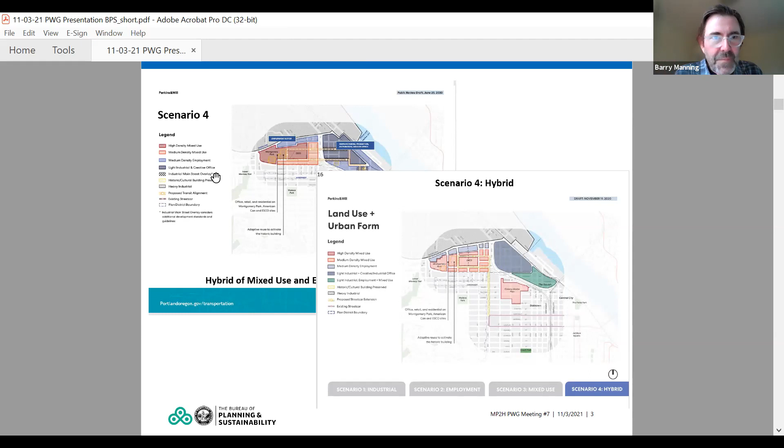As part of that, we were proposing to maintain an industrial, or non-housing, buffer against Nicolai to provide a transition to the industrial district to the north. East of Highway 30, we found there wasn't much development potential for mixed use, and that the industrial jobs opportunities there outweighed the opportunity to transition. So we were going to hold the line on the areas west of 30, and potentially consider at some future date expanding to allow industrial and creative office there, based on the outcomes of an upcoming economic opportunities analysis the Bureau of Planning is involved in, which may change the industrial land supply outlook for Portland.

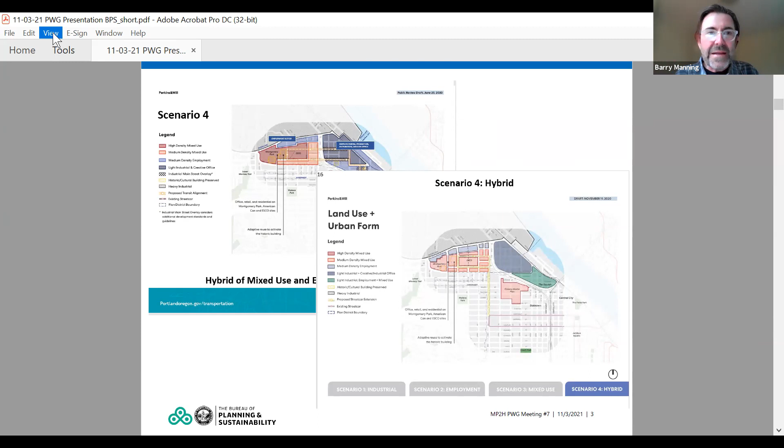We also reviewed the comprehensive plan and zoning for the area. The comprehensive plan suggested some future land uses, I'm circling those now, in the area on the ESCO property and thereabouts, that suggested those areas could transition to a mixed employment designation, while areas to the east were still planned for industry. But we also noticed we had the prime industrial overlay, shown here in this yellow line, that still applied in the area. These areas within the yellow line and beyond to the north, in the more constrained study area we looked at, that land is part of our industrial land supply inventory and is therefore constrained in terms of how much change can happen there without some offsets.

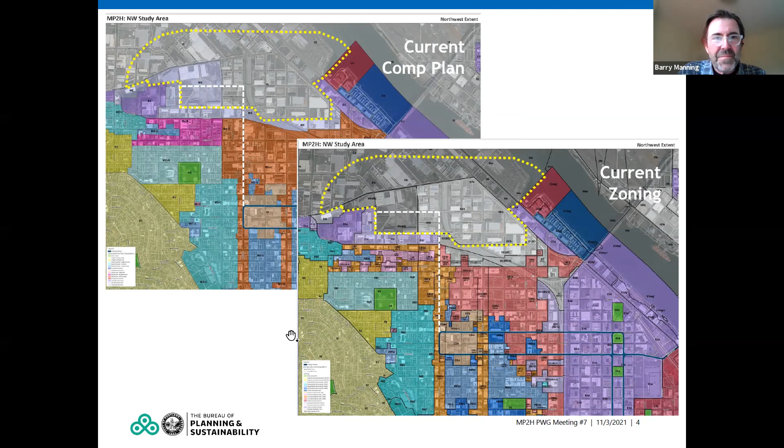We also looked at the zoning map in the area and noted that the zoning in some of these areas is still maintained as industrial rather than moving towards mixed employment. That may have something to do with the prime industrial overlays being applied there.

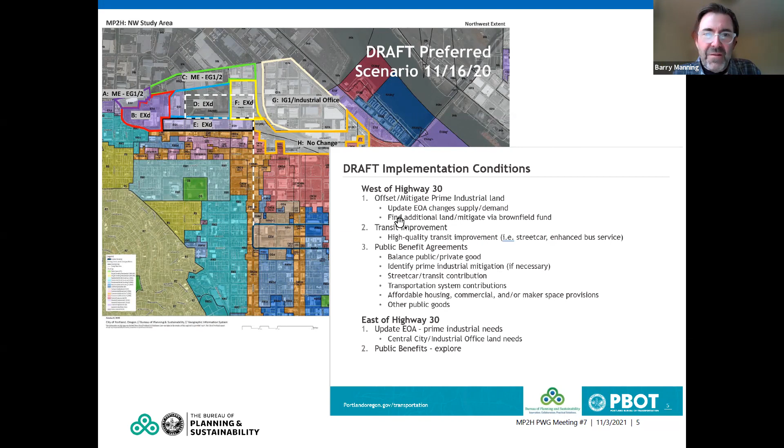We shared with you some preliminary thoughts about zoning for what we're calling the preferred scenario, which was the evolution of scenario 4. This map on the top left shows some of those ideas. We also mentioned that as part of this, there were three primary implementation conditions that needed to be met to really fully realize change in the area. We're going to talk about those in more detail as we walk through this.

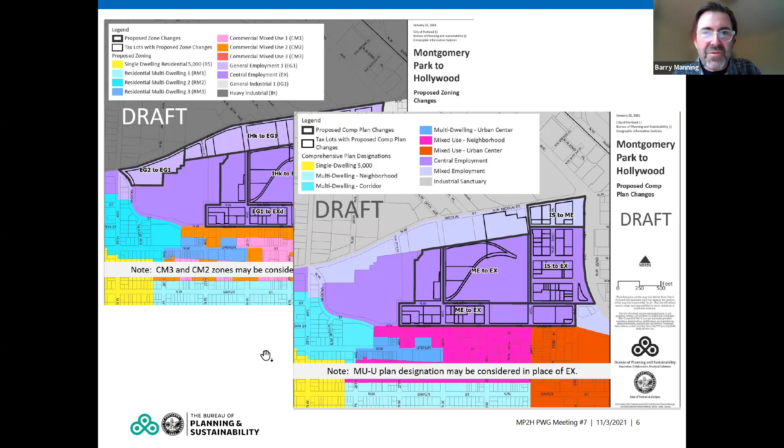Finally, we shared some proposed zoning and comprehensive plan change maps with you. These were shown in February and I think in November as well. We also shared some preliminary ideas about code elements, which you can see at the top of the page here, some zoning concepts in a plan district and some boundaries for a future plan district. Those are shown at the bottom of the page, and a pie chart here showing how value and public benefits might be distributed.

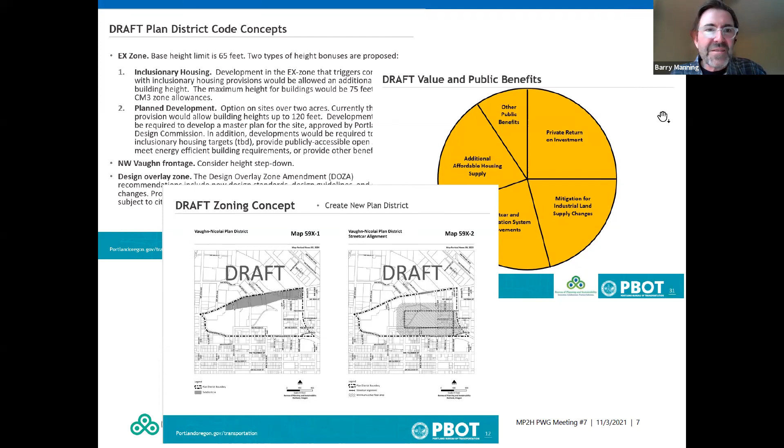If you remember, one of the key things in this project is how do we address change in the area and do it in a more equitable manner that does not impact negatively underrepresented and BIPOC communities, provides opportunities for folks, and does a bit more equitable sharing of the benefits that might accrue due to public actions such as zoning changes or public investments. So that's kind of where we left off.

I'm seeing people nodding their heads, so I assume that looks familiar to folks. So where we're at now is we've got a proposal that's coming out.

In summary, what we're doing is fostering a new mixed-use neighborhood west of Highway 30. We talked about that in scenario 4, which would include changing the comprehensive plan in that area to facilitate mixed-use development. As part of that process we want to create public benefits. The public benefits we had been talking about when we last met are coming more into focus now.

The main one that we're looking for is affordable housing. We're going to be proposing to use some zoning bonus tools to achieve that. We'll talk about that in more detail in a minute.

Affordable commercial space, again, proposing to use zoning tools to achieve that right now. Some public amenities such as open space and energy efficient buildings, again, we're looking at using zoning and bonus tools to achieve that.

And then some degree of equity and wealth building, primarily for BIPOC communities, which might be through contracting requirements or something like that through construction, achieved through a benefits agreement developed with property owners. Overall, we think these public benefits have multiple ways to be achieved.

What you're seeing in the discussion draft, at least partially for the top 3, is a proposal to do them through zoning, but there may be other ways to do that through an agreement with property owners. We want to let that discussion draft period allow for that conversation, both with the public, community members, and property owners, to give us feedback on the best way to achieve some of those benefits. But we are proposing something in the discussion draft.

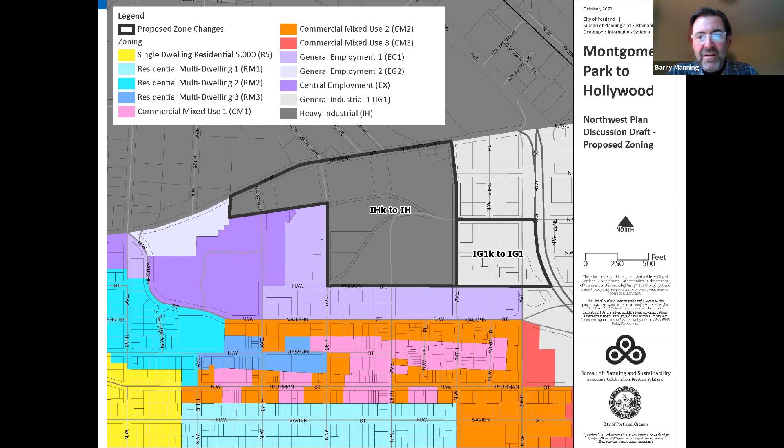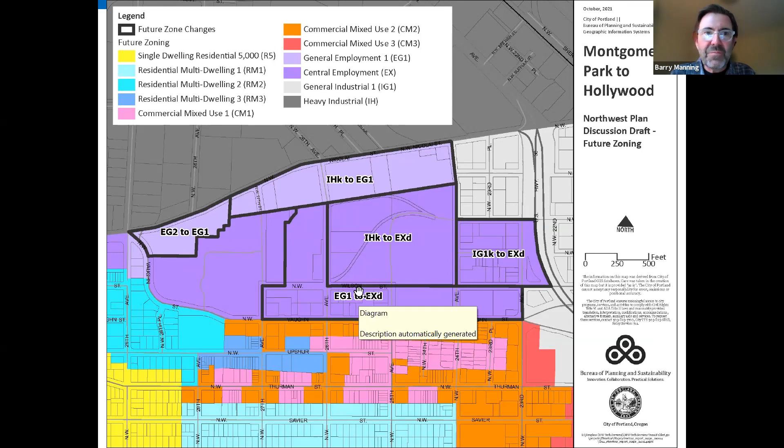Each of these properties has a different set of existing regulatory conditions and constraints. They're all in different zones, with different floor area limitations and use limitations. What we've done is arrange the bonus structure to ultimately get to similar levels of development for many of these properties, not all of them, using a set of tools that graduate how much additional development potential you can get by exercising these bonuses. We'll walk through those in a minute.

The plan district components—I'm starting at the beginning, and we'll get to those use regulations in a second. As I mentioned, the zoning map amendments would have a limitation on them unless conditions could be met to address industrial mitigation, transit funding, and a master street plan for the area north of Roosevelt Street. There's a few use prohibitions.

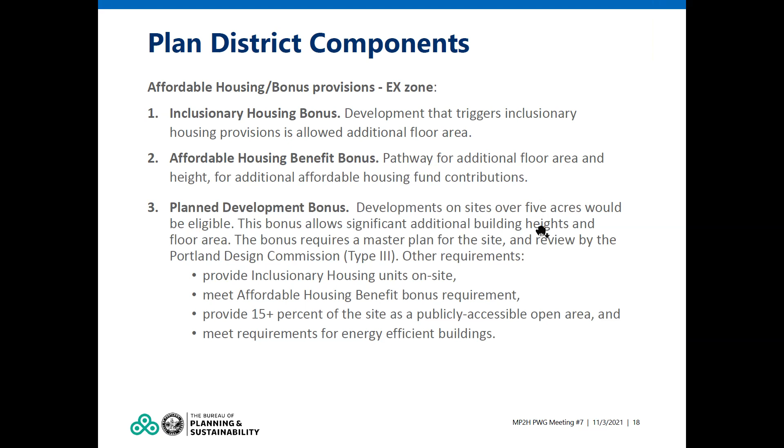Great, thanks, Barry. And the master plan provisions, as they're proposed right now, or plan development provisions, excuse me, are embedded in that volume 2 code. They're at the end of that. So take a look at that. That's where this exists. Okay, thanks.

And I'm sorry, I think I may have missed this, but the subdistrict definition, is that included somewhere? The subdistricts are identified on the map. No, I know, but what do they mean? Oh, well, so again, the different subdistricts will have different floor area and height limits that are allowed within them. And I'm just going to show you what this is. I don't want to spend time on it. Is that in one of these documents somewhere? Volume two. Yep, it is. Okay, I'm sorry, all in volume 2.

So just really quickly, this is a lot of numbers to digest, but we're going to walk through it really quickly so you can kind of get an idea of how this would work in these different areas. So Subdistrict A is the buffer along Nicolai. It does not allow housing. We would ultimately be using the ultimate zoning in that area, which would be EG, an employment zone.

It would have a base FAR of 3:1, which is what the EG zone has currently. But that FAR would be for industrial uses, and the maximum FAR for other uses such as commercial would be limited to 1:1. The base height is 65. That's already allowed in EG. But one would have to apply for bonuses to get additional FAR and height.

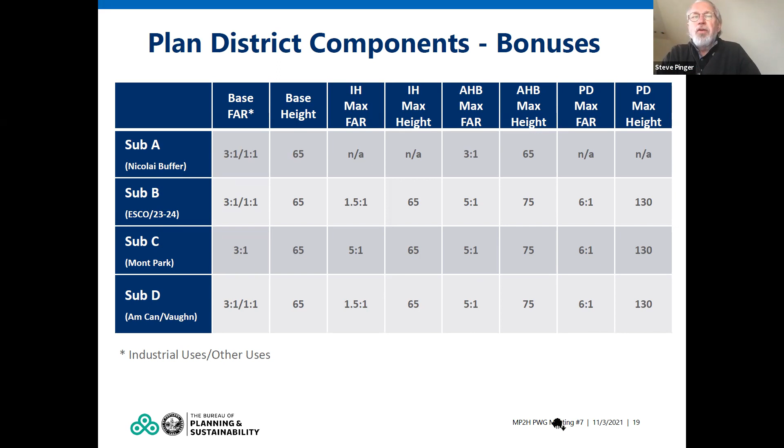Steve: Yes, it does, Barry. Without commenting on that, it certainly does. I'm just having trouble locating this information in volume 2. Is it in there somewhere? I'll point out where those things are at the end of the presentation.

Greg, I saw you have your hand up. Why don't I go ahead and answer your question really quickly? Yeah, thanks. Yeah, that's good information.

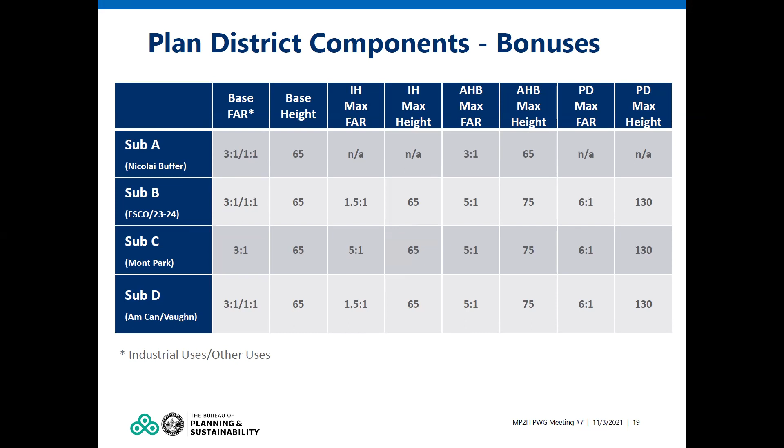I was also wondering, you had that graphic early on in the slide presentation showing the current and the future layout. How does that, this is all a lot of numbers, a lot of information. Graphically, does that show one or more of these? As far as, I don't know if you can go back to that.

Maybe the sub areas. So this map 590-1 shows those 4 sub areas. And you'll see, this is the graphic convention of our zoning code. So it's not necessarily as user-friendly as you would like it to be, but you can see they're detailed down here. Okay, no, I get that.

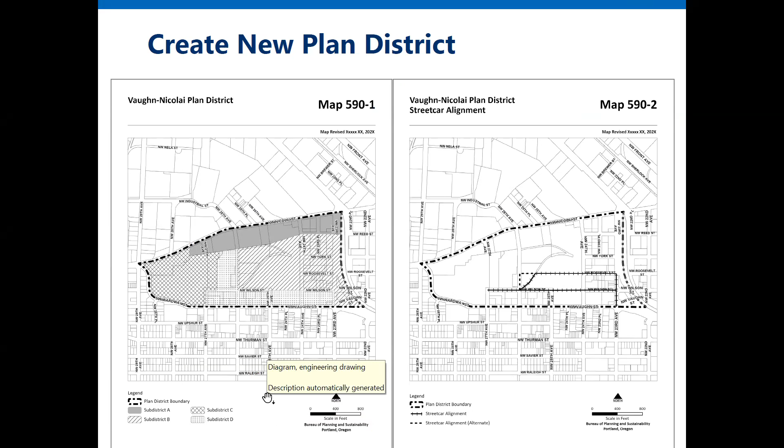Yeah, that's great. I see how that tied into the different areas, but I was talking about the architectural graphic that made it a little easier to see the 3-dimensional type. Oh, let me walk through the code and let's save that, we can come back to that a little bit later. Greg, is that okay?

That's fine, thanks. So Barry, this information's on page 41 then. I think I finally found it. In volume, is that 2, correct? Probably. Table 590-1. That is it. That is it.

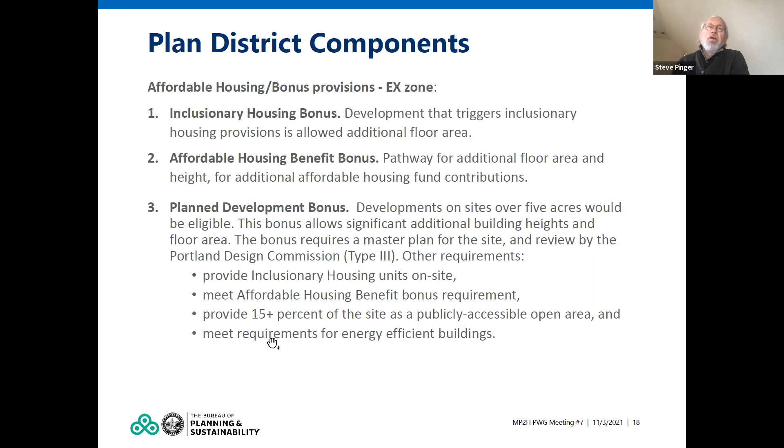Okay, so just a few other regulatory things we're proposing in volume 2. I mentioned the commercial floor area—it's limited in some sub-districts, which is what I walked through in that table. Again, additional floor area is allowed through the affordable housing benefit bonus option or the planned development bonus option if they go in that direction.

Height limits: we're proposing a base height limit of 65 feet, which is what most of those properties are allowed to build to right now. We're proposing a step-down height of 45 feet near Vaughn Street to match or mirror the scale of development across the street in the mixed use zones. But one could get additional height via some bonus options.

We are proposing a minimum residential density if property owners go in the direction of developing residential units on their property. And then we have some other typical urban plan district kind of provisions.

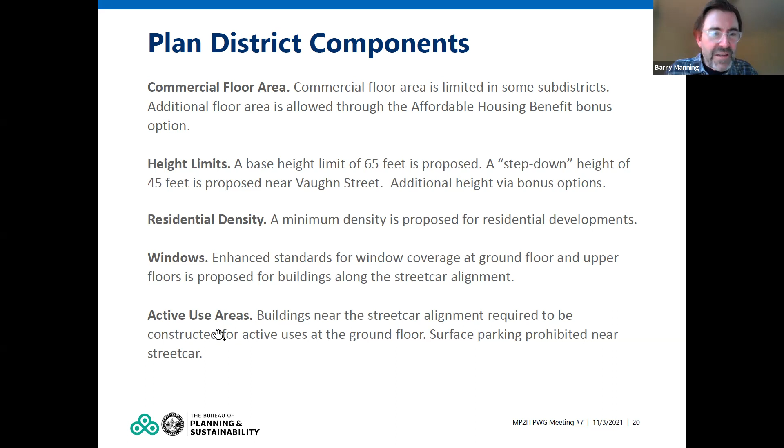We're asking for higher levels of window coverage at the ground floor, particularly near transit, near the streetcar alignment. We're asking for active use areas near the streetcar alignment. We're limiting parking, and particularly limiting surface parking near the streetcar alignment.

One of the new provisions that was in our mixed use zone code was the requirement for on-site open areas for residential units, so we're including that in this plan district. That would be similar to the CM3 zone in the mixed use zones. This requires a minimum amount of open area per unit that's built—36 or 48 square feet per unit, depending on the scale of development.

Prior to this, some of our more intense zones did not require any open areas for residential development. The intent behind this is to provide either individual or collective green spaces that serve the residential units built in these areas.

We're applying the design overlay zone, which is a tool we typically apply in the high density or higher density zones in the city. Steve and others familiar with the NWDA design overlay will recognize that. It requires either use of supplemental design standards or potentially review with use of design guidelines, depending on the type of proposal.

We're applying a transportation demand management requirement. This is something applied in our commercial mixed use zones that requires new developments with residential units—and we're applying this to large commercial developments here—to create a transportation demand management plan or subscribe to an off-the-shelf program.

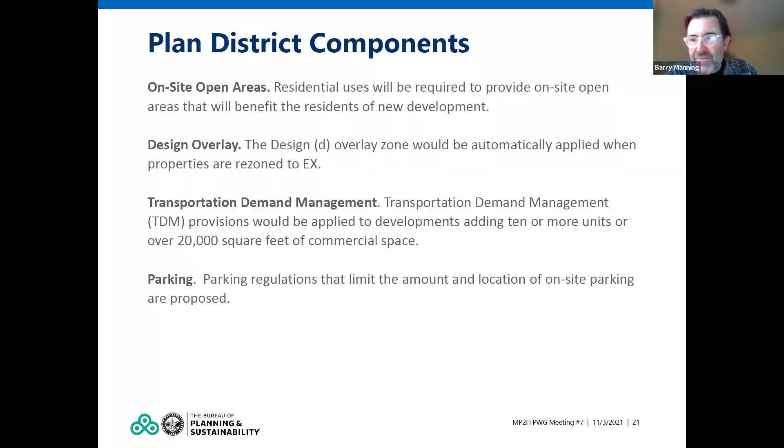We haven't gone that far with the code, but I'll let Julia and Mauricio speak to that when they talk about transportation, unless you guys want to hit on that now. I think I can hit it now.

What we have citywide is a proposal and a regulation that says upon new construction, each new housing unit shall provide $1,000, I think, to be used for TDM purposes. That wasn't the case at Conway, so I think we started with that premise. That is what's in volume 1.

The main approach has been to go ahead with streetcar and with parking regulations to address the supply—we don't want to overwhelm the district with vehicles, and we want to maximize the density. What Mauricio is talking about is the off-the-shelf option. There's also still an option to do a custom plan through the review.

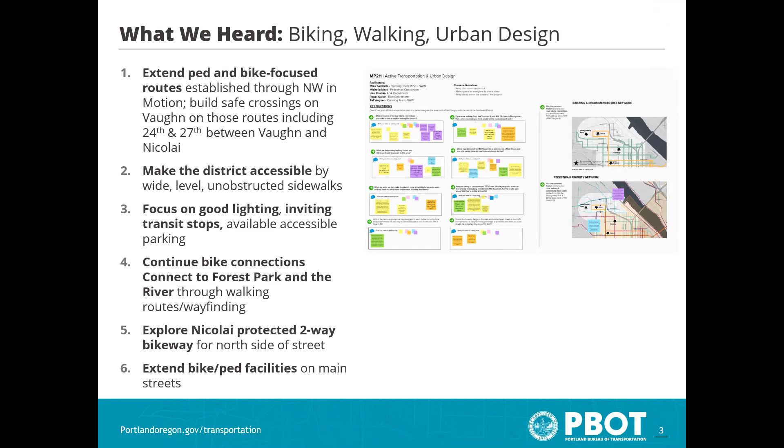Right, so for large complex sites it might be more beneficial to do the review and a custom plan; smaller sites might be more beneficial to just do the off-the-shelf option. At least that was the thinking with the commercial mixed use zones. Steve, did you have another question? Oh, I'm sorry—okay, any other questions on the land use piece of this before Julia takes over?

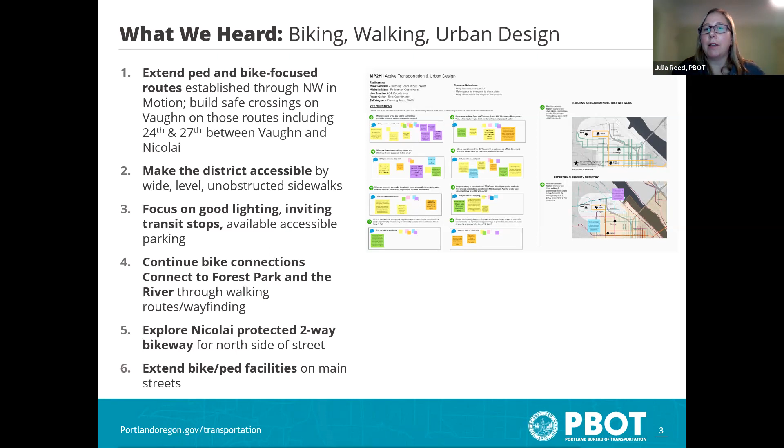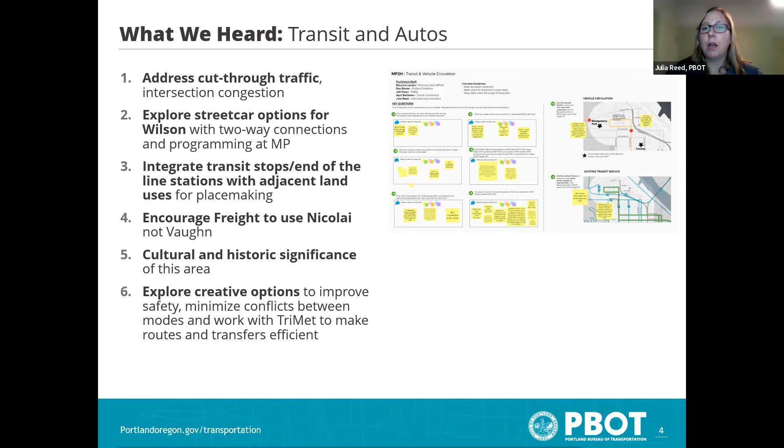I want to start with a recap of what we heard from community engagement about transportation, zooming back out from what we've been discussing. We heard support for extending pedestrian and bike routes through the district, including improving connections to Forest Park and to the east, interest in making the district accessible for people of all ages and abilities, and the importance of active ground floor uses, inviting transit stops, lighting, and on-street parking. We also heard concern about traffic volumes and cut-through traffic. There's interest in exploring a two-way streetcar option on Wilson, which I'll talk about in a moment, and support for creating great urban spaces through transit station environments and other urban spaces in the district. We've been engaged in conversations with community-based organizations to elevate the voices of disproportionately impacted communities, including ways to honor the cultural history of this area.

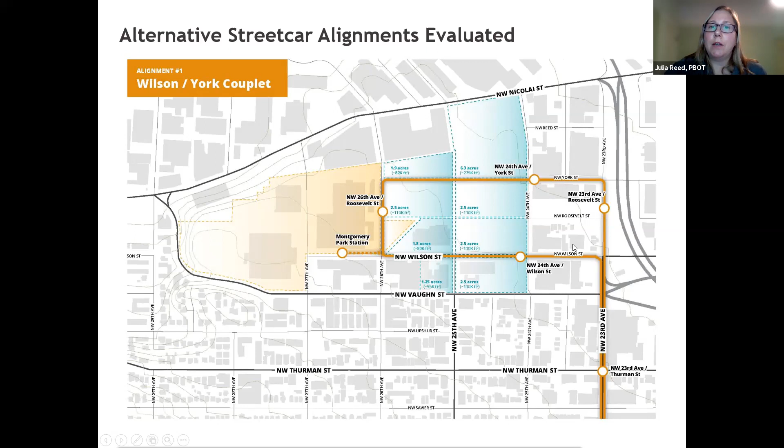Last time we met, this was the alignment: a couplet streetcar, westbound traveling north on 23rd, west on York, south on 26th, then returning one-way eastbound on Wilson to join 23rd. This York alignment was really a legacy of when we were considering an alignment east of US 30. Based on conversations with property owners, we started evaluating other options.

So this is the two-way streetcar option on Wilson. The streetcar would come up 23rd, travel down Wilson, terminate at Montgomery Park, and then go back on Wilson. We found that this was fatally flawed—it doesn't work for streetcar operations because of the delay it would cause at the 23rd and Vaughn intersection, and it would also eliminate access for property owners on Wilson. So that one is not viable.

This is the alignment for the streetcar that you'll see in the transportation draft next week. We have a separate transportation plan that we'll email to you a week from today—you'll get to see it before anyone else. This shows Roosevelt and Wilson with a tail track. The streetcar would travel one way westbound on Roosevelt, stop at Montgomery Park, and then go back on Wilson. This is a natural progression of the streetcar alignment design. It's compatible with other planning done to date, and our engineering review doesn't reveal any significant impact to traffic operations, including the ramp at the Vaughn and 23rd intersection.

As with any of the other options, this would require the northern section of the ESCO site to meet street connectivity requirements. We're showing these as indications that there needs to be a street connecting along the alignment of 25th, connecting north to Nicolai, and some east-west street connection is needed. It doesn't necessarily need to be right at York—it could be a little further north. There's flexibility in this.

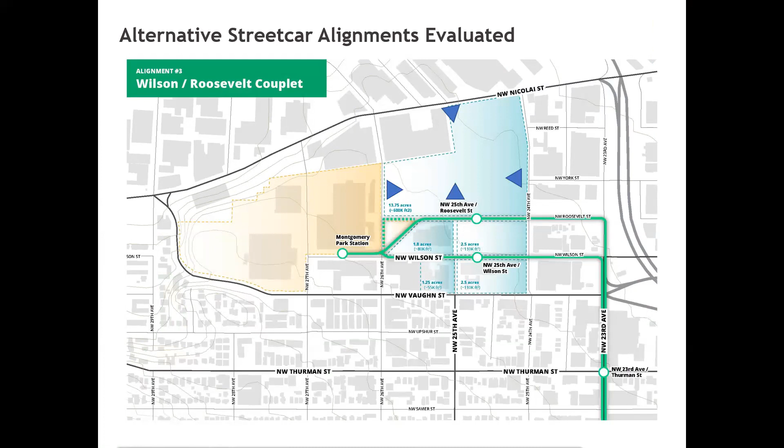I have a question. I understand why the one-block couplet makes more sense than the two-block couplet, but you mentioned the two-block couplet was fatally flawed because of impacts to operations at 23rd and Vaughn. No—the one that was fatally flawed is the alignment that isn't a couplet at all; it's the streetcar traveling down Wilson and turning back around. That's what I meant, but you mentioned that this one on the screen is fatally flawed. Yes, at 23rd and Vaughn, but the one-block couplet wouldn't be, and I'm confused as to why that is.

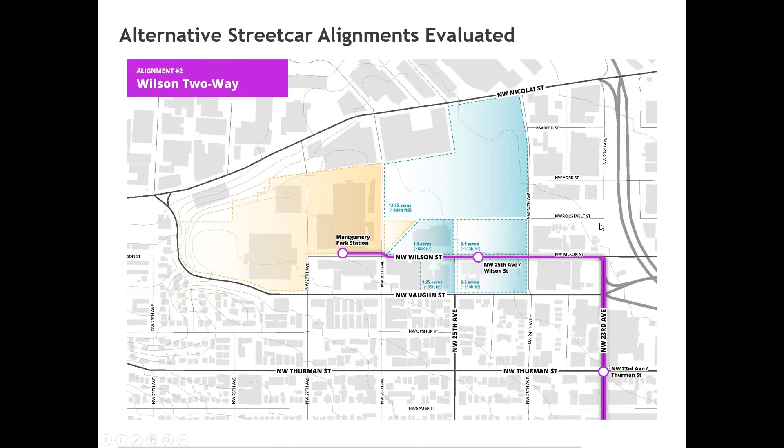Excellent question—I'll start, and others can chime in. It has to do with both streetcars turning at this intersection versus one traveling up and not getting stuck in the queue back here. Does anyone else have anything to add? One part of it is that the northbound streetcar would have to sit on 23rd to trigger the signal and stop all traffic to make the turn, which would back up traffic into the Vaughn and 23rd intersection.

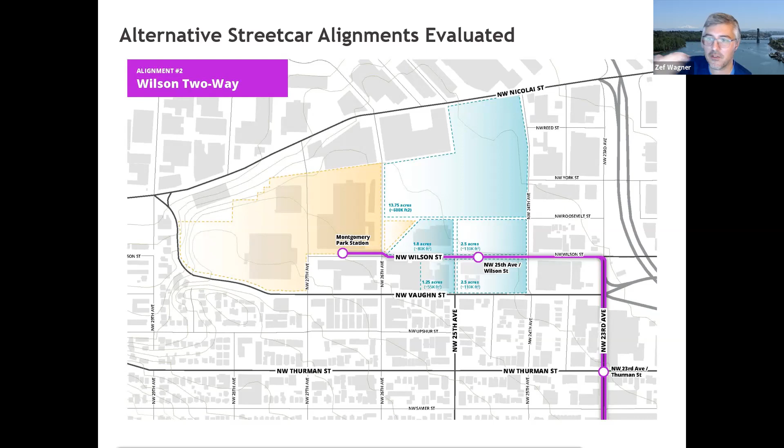Whereas if it goes north to Roosevelt, we can time the signal so that it clears both of those signals and doesn't have to stop until Roosevelt, which just having that extra block provides more queuing space. The other thing, Roosevelt will be easier to make the turn because it's a T intersection, easier to stop traffic. And the other issue was that Wilson already exists between 23rd and 24th and between 25th and 26th, and you wouldn't be able to have a streetcar going in both directions on a single track and still have vehicles access all those driveways of those businesses.

And finally, this option came up as part of our public outreach back in the day, and it's something that the property owners at Montgomery Park were still interested in. So we took a closer look.

But also the York alignment is, if you will, a legacy idea from when we started the project, when we were looking at streetcar on both sides of Highway 30. Through the public process, we decided to focus the attention of land use change to this side of the freeway, and therefore reevaluating the alignment. We don't have a reason like we did in the Pearl, where we needed to go by the Good Samaritan Hospital.

Here we can run a streetcar on two streets next to each other. I think that's better, operationally it's cheaper, it's a shorter alignment, and also it can provide access to a tail track, if you will, to Montgomery Park, something that we've heard quite often. But still maintain operations because it's a shorter alignment.

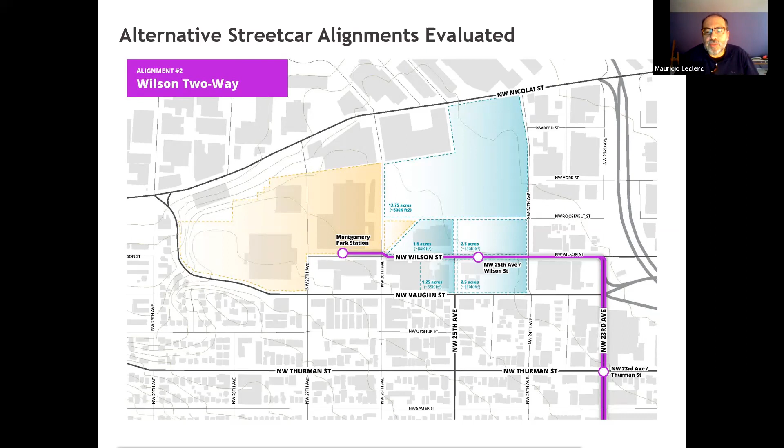So all these factors are pointing to a new alignment that you did not see before, but it's roughly a refinement of something that's already been discussed with you.

So I think another factor, Mauricio, just from the land use side, is that it allows a little more flexibility for the larger acreage on the north side of the ESCO site to evolve over time, rather than committing to that east-west connectivity in exactly the street location.

And therefore we met with ESCO and Montgomery Park to begin to understand what streetcar means, what are some of the pros and cons. And out of that discussion came this new alignment, again, consistent with what we've discussed so far.

Phil, did you have a question that was different from Reza's? Yeah.

I'm fine with this alignment, and I think we all know streetcar is the centerpiece of the study, but I think it would provide useful context on a map like this to also show the bus routes, because streetcar is not the only transit mode serving the study area. There are several bus routes also in the immediate proximity, especially a new one over the Fremont Bridge, which I think will be important. That's coming up in subsequent slides.

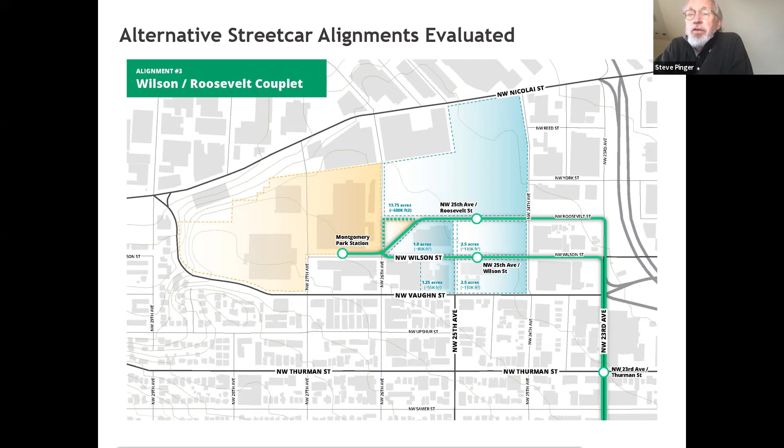Right, no, I understand all of that, but what it takes, and what we discussed with the larger Northwest area, is to do a streetscape plan to look comprehensively at this. But please, these specific impacts have been mentioned previously as being actual, and I just want to confirm for the sake of my group, are those likely to be the impacts? Yes or no?

Well, we haven't analyzed it. It is likely that. Okay, that's fine, but that's what had been relayed previously. Yeah, and we haven't quite analyzed it, so I can't give you an answer.

But that's dependent on the streetscape study? It depends on many factors—there are utilities, there are opportunities. Oh, yeah, I understand, but the streetscape study is far from definite at this point, I would say.

No, it's funded by the city, it's in our budget. Through the PSAC? Not the streetscape plan, that's my understanding. Two things are getting confused here—sorry, we might be using the same term for two different things.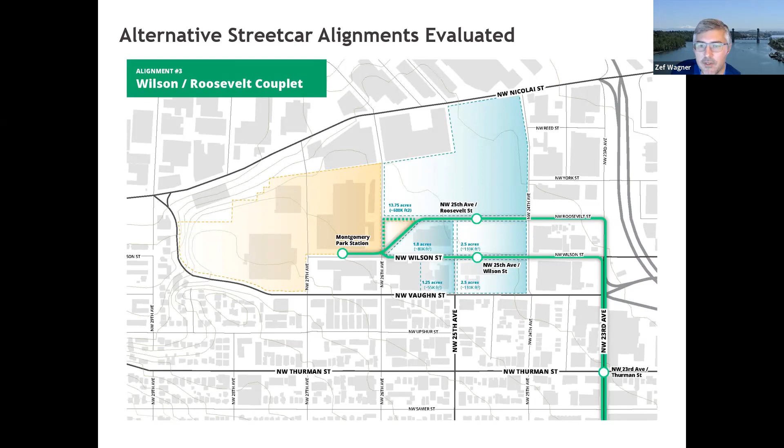The parking committee, I believe, is funding some streetscape work south of Lovejoy on 23rd and 21st and some other streets. From York to Burnside was the original proposal. Okay, we'll need to revisit that—the last thing I had heard needs to be clarified. Let's move on, yeah, we can follow up. My understanding is it's funded.

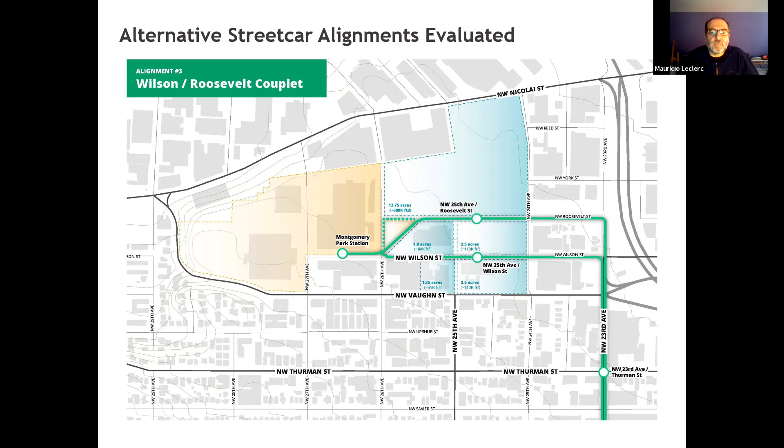Okay, let's move on. Yeah, thanks, Phil, for that question. We do have more transit stuff to discuss.

I just want to do a walkthrough of the vision map, starting with the major roads. Much of the vision for the district, transportation-wise and land use-wise, is the same, with a few design progression things I want to point out. One of them is the streetcar alignment.

We're doing this plan because of near-term and known anticipated land use changes, but also for the opportunity to shape a coherent transit-oriented district here. Extending the streetcar is one of several ways that we're going to help reduce drive-alone trips. So this is the streetcar alignment again.

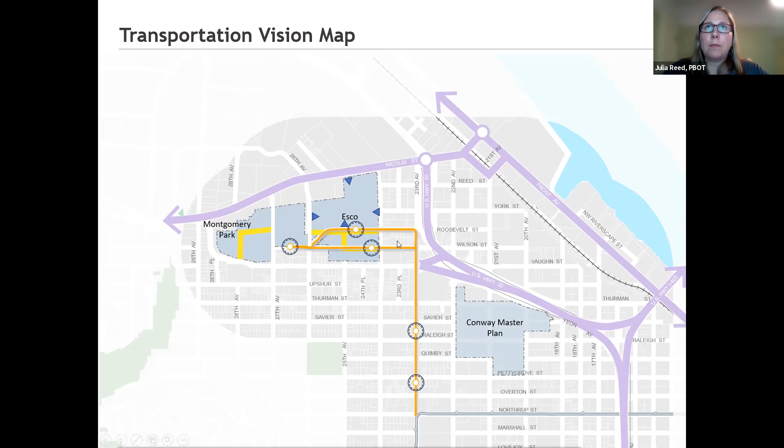Also, the yellow indicates new streets. This is a new private street that will be publicly accessible through Montgomery Park—it's in their plan. And this yellow underneath shows the formalization and extension of Wilson, extension of Roosevelt from 24th to 26th, and the extension of 25th to Roosevelt.

And again, those future streets that will need to be constructed north of Roosevelt. The pedestrian and bike connections within the district build off of the recommended ped-bike projects from Northwest in Motion—extending the 24th Greenway north to Nicolai, making Vaughn safer, improving all crossings of Vaughn. We see 24th as really the primary pedestrian and bike entryway into the district.

I also want to point out that we are putting in our plan the recommendation for using the abandoned railroad spur on the north side of Nicolai as a multi-use path. One of the things we thought about in developing this is ways for folks to safely get around the US 30 interchanges—looking at ways to provide safe, low-stress routes without having to cross the on-ramp.

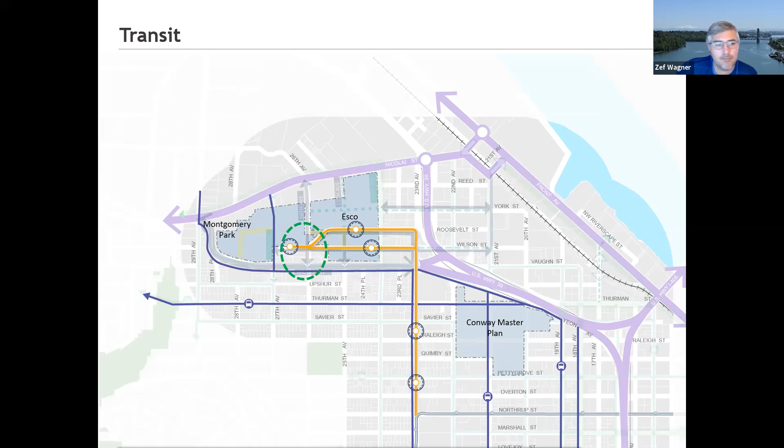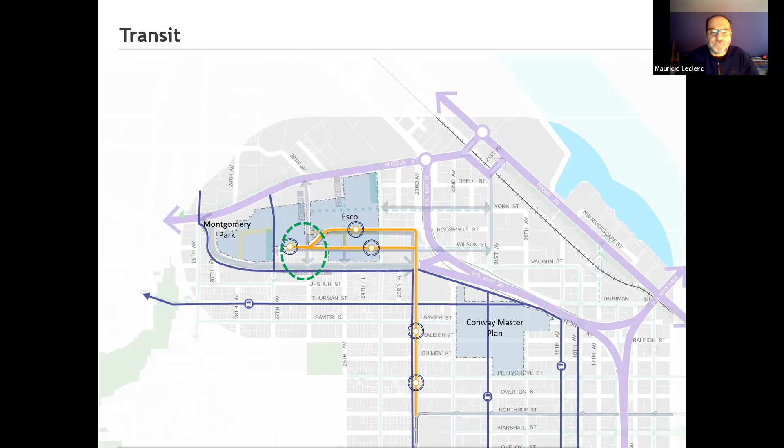We're trying to do a lot of things with this plan. One is a land use plan with a long-term vision, and also a bit of project development for streetcar. Let's make sure we know what we're looking at here - this is very much a concept at this point. We have an alignment, but the precise location of stops, far side, near side, all that is to be determined with a subsequent project.

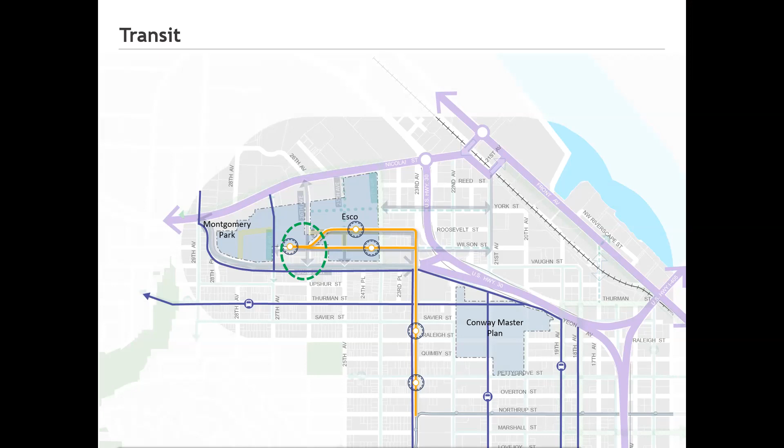The other question I had is this seems to be missing whatever future transit line might be on Raleigh Street, which was in the North Central Service Enhancement Plan for TriMet. I know it's kind of far off in the future, but it's a line that's very important to the Pearl District. It's on our radar, though I'm not sure exactly where it would make sense to go.

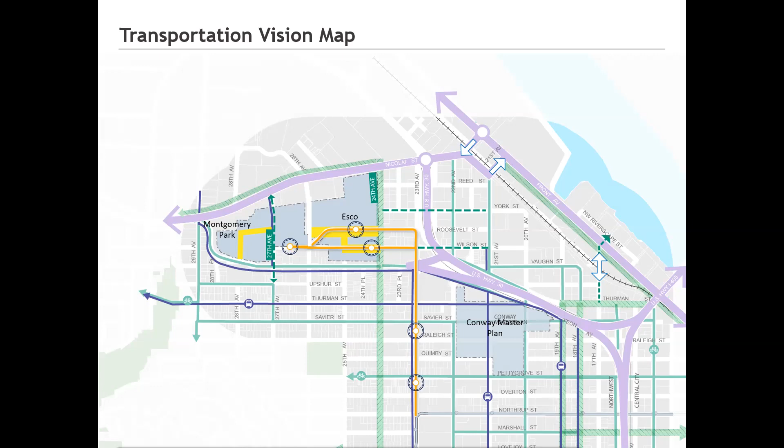Maybe now that this streetcar line is going to 23rd, it makes sense to think about whether that line could go into that squish area north of Highway 30 and terminate at the ESCO site to provide more transit coverage in this area. But please include the bus line on Raleigh, the future line there as well, because that is part of the vision for this part of Portland.

Yeah, this is an interesting area from a transit perspective. Also, line 16 from St. John's is highly underutilized - oh yeah, that should be on there as well.

It'd be nice if we could integrate what would be the larger transit network vision for this district. Having these potential land use changes allows us to have a deeper conversation with transit and with TriMet in the near term, especially if we move forward with the streetcar project, right? Right. So, good questions.

Okay, Jen, you had a question - has her hand up yet?

Hi, Julia. I just wanted to express appreciation for how you've unpacked the complexities of this. While I understand there's some future state stuff, it's been great to actually track what's happening, because not everyone at this table has all this jargon under their belt. Thank you for making it accessible for people who are not familiar with land use planning but want to help inform decisions based on community feedback. So just wanted to say thanks.

Perfect, thank you, thank you. Now I think my slides are next, and I hope not to - Phil's got his hand up. Okay sorry, quick one, that was a nice comment from Jen, so I agree.

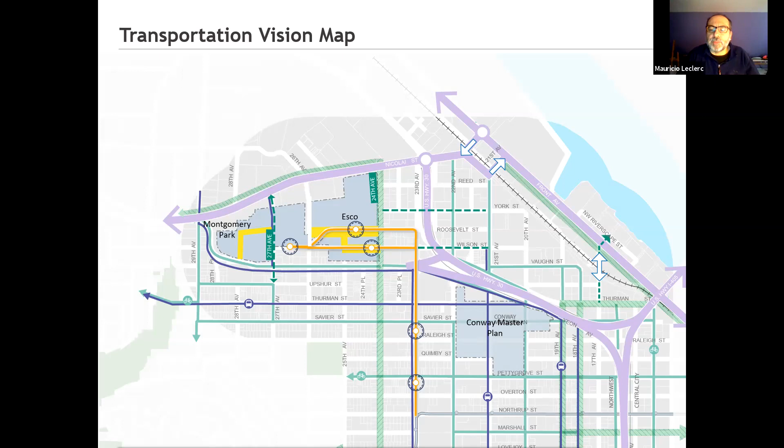We'll certainly have an action item identified in the plan to continue and have a more thorough conversation as these changes take place, engaging TriMet now but more if adopted by council. Here, we're just beginning the discussion.

All right, so I hope not to undo what Jen just said, or overwhelm you with information. I'm going to provide a very broad view of the traffic analysis and the circulation at a very high level. We hope to, no pressure right now. So basically, what we're talking about now is...

We take into consideration what Julia just mentioned. There will be a streetcar, there will be new streets of high quality, high urban design standards, new bikeways and transit options.

But of course, with growth in an area that already has a lot of traffic, what does it mean? To do that, we take these numbers that we've shown you in the past and today, just thousands of new jobs here and housing units. What does it mean for the street network?

Basically what we do is use a transportation model. We translate those numbers into numbers that belong to a block, representing buildings and activity, and we run the model with existing traffic and all that stuff. So we have done that.

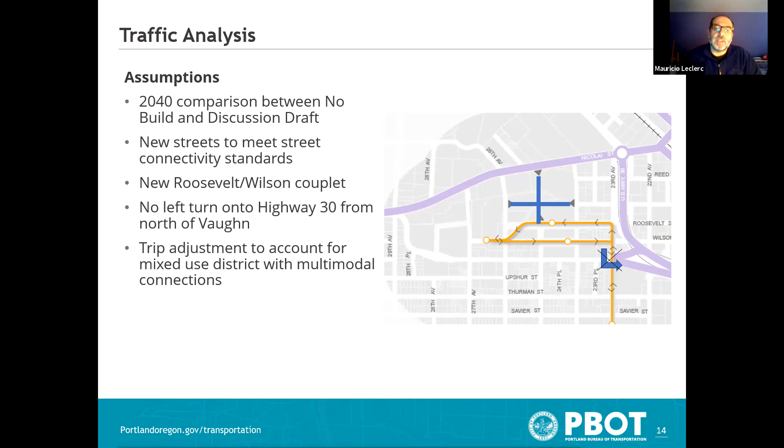The no left turn from southbound to eastbound at 23rd and Vaughn, what will need to be done to make sure that traffic doesn't get just shifted to 24th, which is meant to be the bike priority street through here? We don't want that. I mean, I think Northwest in Motion might address that. Northwest in Motion has a project which would prohibit traffic going south of Vaughn from north of Vaughn on 24th. So that helps. Yeah, I think that would help.

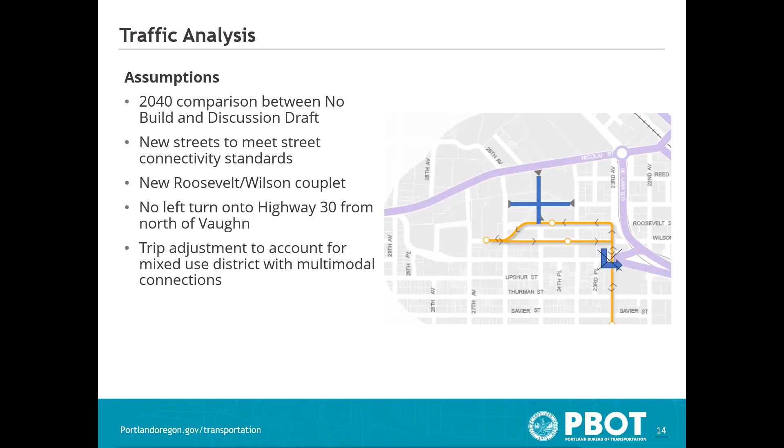So I had 2 more slides. Basically, overall, despite the changes to more walking, more transit, more biking, there would be an overall increase in traffic coming from the study area. That means both sides of the freeway, particularly on the west side, almost all of the new trips. So more traffic overall in the study area, plus a bit to the north of Nicolai - not very much - a little bit south of Vaughn, a little bit more, but not a ton.

Some of the traffic goes onto Highway 30. There's quite a bit more traffic that goes to the freeway and does not come to local streets. However, there's more traffic on the local streets. So then west of Highway 30...

The internal study area local network, the new streets, the couplet will work pretty well. We're talking about PM peak - imagine yourself 2040 PM peak, which is typically the worst part of the day in terms of volume of traffic. So the streets, the couplet helps, the new connections help. I think a streetcar could flow pretty well through the district.

There will be more traffic onto Nicolai, onto the collectors between 23rd and 24th. I forget the exact numbers eastbound, about 140 new cars. We're talking about Nicolai having hundreds, maybe thousands of cars an hour, so this adds more to Nicolai, particularly between 23rd and 24th.

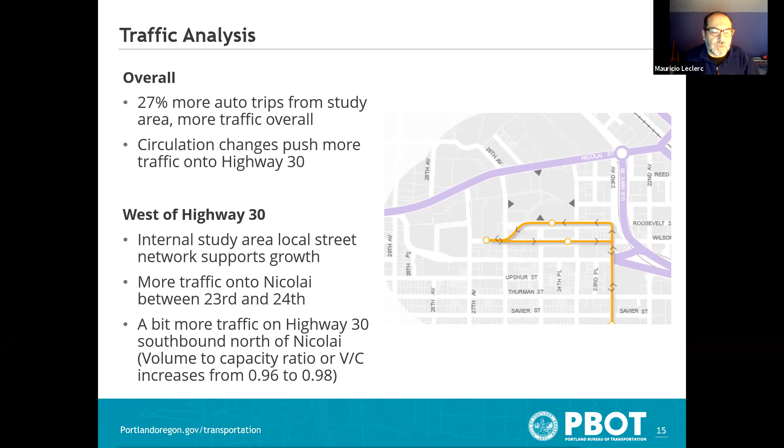The point is we wanted to address some of the traffic. There's a lot more traffic internal to the district now, so some people are looking for ways to get to the freeway further north, and that's some of the impact you see there. Next slide.

East of Highway 30, as part of our study area, there will be some increases, but it should not affect industrial operations. These are low volume streets and should remain low volume streets 20 years out during peak time. Then at 23rd and Vaughn and Highway 30, because of the restriction on no left turns, there is a significant decrease in southbound Northwest 23rd volumes north of Vaughn.

The traffic from the district uses Vaughan instead, so there's a shift from 23rd to Vaughan, primarily eastbound, with an increase there. Overall, there are fewer trips using the 23rd Vaughn interchange, and a little bit more on Nicolai, to the point where the V over C congestion metric goes down from 0.95 in 2040 to 0.90.

I think that's encouraging to us. South of Vaughn, there will be more traffic on the north-south streets, in the range of 40 to 70 trips an hour, so maybe one to two cars a minute in the peak, relative to the hundreds already there.

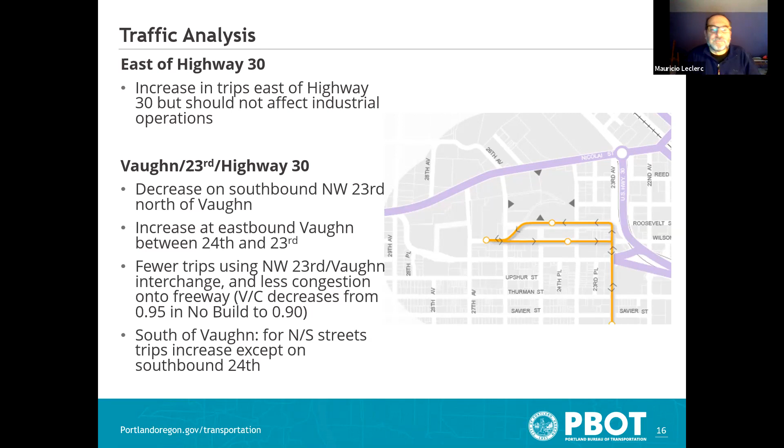Okay. Did anybody need to see the map again, or are we doing okay, folks?

So that kind of gives you a little bit of a sense of what we've got out there. We know that discussion draft that we sent to you is a lot of stuff, and the transportation is going to have a lot in it too. I was going to mention that. Well, I've got another slide. I just want to kind of walk you through what we think the rest of the process is, and then hear a little bit more from you all about your thoughts.

But just the volumes that you have right now - Volume 1 is kind of the plan part, the policy part. The first chapter, the summary and overview, we intended that to be almost a standalone thing, an abridged version you could walk around with, the elevator speech part, the first 10 or 15 pages. It doesn't have any code, but it tells a story of what we're proposing. All the other chapters that follow are supporting material and more information - the background, the community involvement, and the last chapter about the implementation approach gets into more of the weeds, the nuts and bolts. That's all in Volume 1.

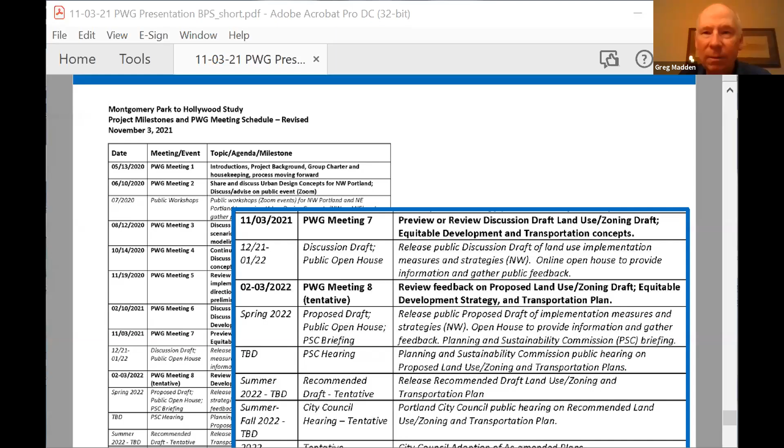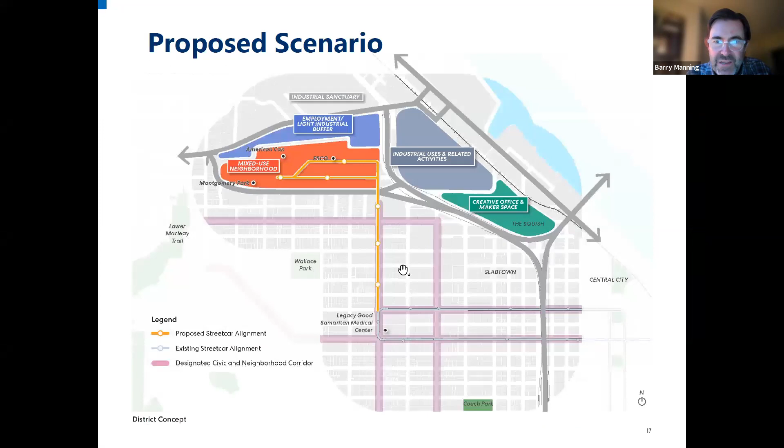I think it's pretty conceptual, but that diagram was trying to say buildings could be up to these heights. I think these are showing up to 10 stories in these areas. We showed this in the area where the larger 5-acre or more sites are likely located. Some of the smaller stuff, the 4 or 5 story stuff, is down here on Vaughn because those sites are smaller. Similarly, over here on Roosevelt, smaller site, lower scale. And then we try to transition - this diagram doesn't show it very well - down towards the Nicolai border, showing more lower scale industrial type buildings that might have a big footprint, but they're not super tall.

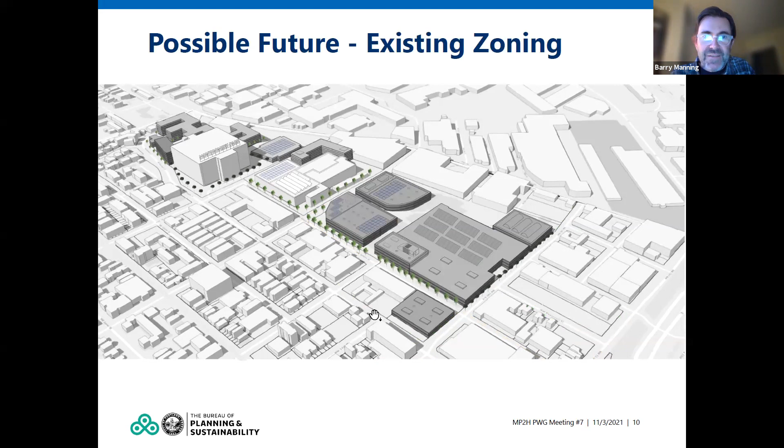And this is done for purposes of illustrating how different it could be versus the existing kind of regulations that allow something more like this. And I would just add that while it's conceptual, it's actually calibrated - it's possible that the proposal would allow something like this to happen. This is showing something more akin to what the planned development, the higher intensity bonus would allow, rather than the lower intensity bonuses or the base. The base would be much smaller, and even the mid-range inclusionary housing or affordable housing bonus would be smaller scale because you couldn't get to these height limits.

Okay, no, that's fine, that's good. Actually, I was involved with the Conway plan, and they built an actual model, and it was pretty good just to see what that impacts visually.

My concern is, and I think a lot of the neighbors too, is just looking down on the industrial area. And I was looking through that second report, and it does show the changes of the Guild's Lake plan to the Vaughn Nicolai plan. And that's what I need to report back to our group on, is what kind of impact that's going to have on the development in the area as it looks down upon the Nicolai area.

And of course, some of my feedback I've been giving is just the impact of the egress for trucking in the master plan, freight master plan for Nicolai, and what kind of impact all these residential homes are going to do as far as exiting through Nicolai and bottlenecking that. We've already avoided Vaughn as a trucking route in several ways, and now the vehicles are going to be moving towards Nicolai. It's going to be a challenge. You can't stop progress, but I see we might want to think ahead, like you're doing with the traffic and all that.

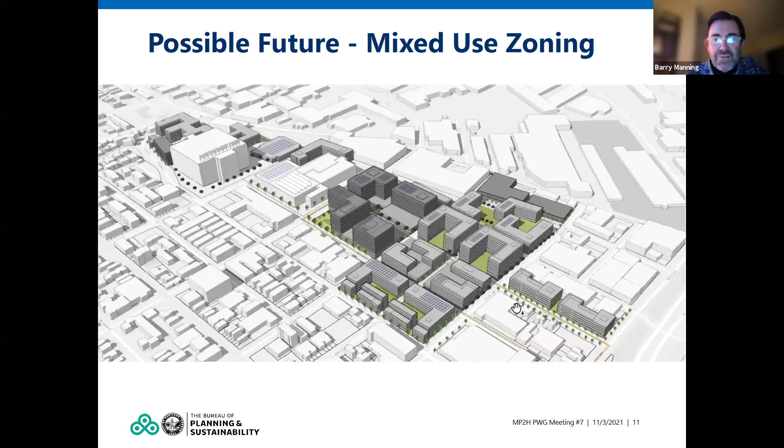Greg, I want to also highlight one specific question we've been grappling with that you know, we'd love your input on. Barry, on the zoning map, we left a small square west of Highway 30 still in the industrial zoning, north of - I think it was north of York, right? Yeah, I'll show it to you here. And right here, yeah - so we've had a few conversations with folks who have businesses in that area about whether it makes sense to leave that industrial, or whether the parking impacts would just be too much, and that we should just shift that with this proposal. With the initial proposal, we erred on the side of minimizing the loss of industrial land. But that's an open question as to whether that little square there is a viable remnant to keep industrial or not.

Either way, if we transitioned that, as shown earlier, the blocks between Nicolai and Reed would probably have that EG zoning, maintaining the buffer to the industrial area to the north. But this block here could potentially go more mixed use. Like Eric said, we erred on the side of caution with a conservative approach to the industrial land in this proposal, but we're looking to hear feedback.

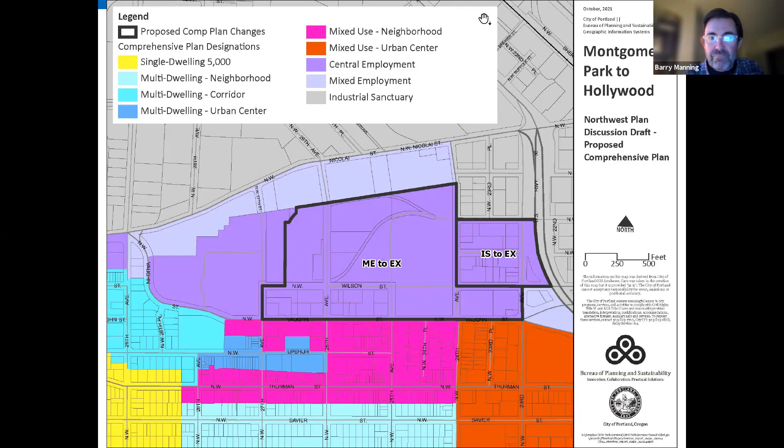My feedback would be to keep it industrial. I know McKenna's there, they have close to 80 employees, all well-paid jobs, well-positioned, good positions. Our survey and our work with Columbia Corridor showed there's a lot of good living wage jobs for BIPOC populations and people without much education past high school. I appreciate that feedback because I look at that immediate area and it's a high concentration of really good wage industrial jobs. It's kind of an anomaly right in the middle of there. I personally favor a lot of those jobs, and I know a lot of the business owners in that area personally.

I'm going to see Brian's had his hand up for a little while, so let's go Brian, and then I see Steve's got his hand up, and then we'll take other comments or questions.

Looking at the discussion draft, I see Lisa's on, there's a few mentions of Prosper Portland, which is fairly new. I'm just wondering what's the background on that, and at what point do they get engaged, and in what forum and discussions has there been? I just saw it on the action chart, and I hadn't, and there's no explanation, it just kind of appeared. So I was just curious about that.